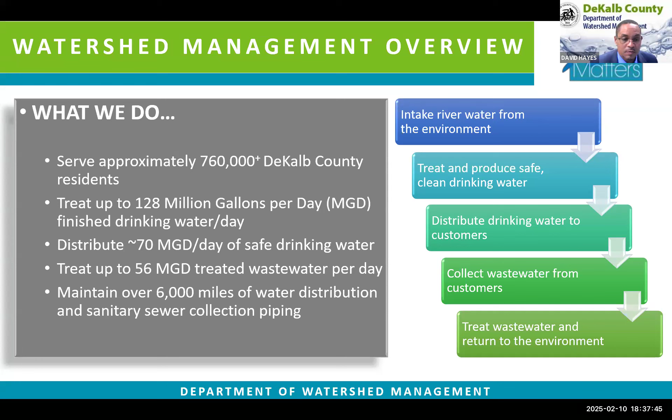So what are we talking about here? DeKalb has a gravity system, which we call a gravity main. The gravity main conveys sewer from your communities back to our wastewater plants. Your homes and businesses connect to those gravity mains using what we call a lateral, a small pipe leaving your house and tying into our sewer system in DeKalb County. What's happening is these laterals and sewer mains age, and as they age, they crack and develop imperfections. Over time, construction equipment or shovels may damage the pipe, allowing roots to get in and block or continue to break the pipe. There are also a great deal of illicit connections, meaning someone may connect their gutter system to their lateral, which then goes to our gravity main. This collection system is only designed to handle sewage, not stormwater. Stormwater takes up capacity and fills the pipe, and we don't want the pipes filled. So these projects are addressing those issues with our sewer main.

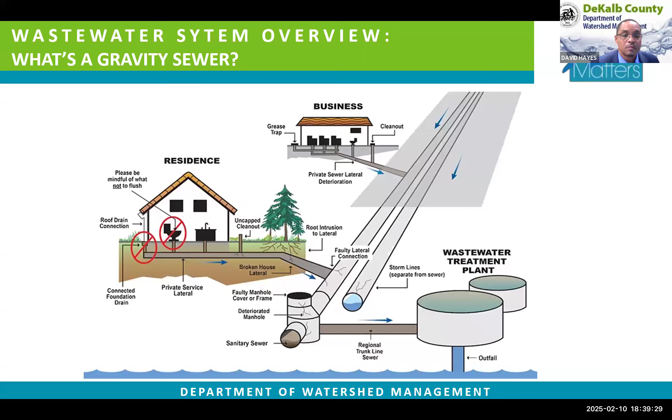So as I mentioned, what we're going to accomplish here is upsize or upgrade the system. We're upgrading the system to allow DeKalb to continue to grow and develop, and to be able to take care of more than 760, almost 800,000 ratepayers and customers throughout the county.

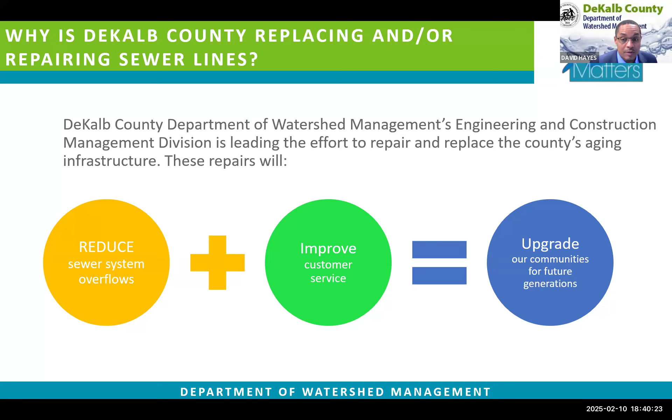We're doing that by improving the sewer system. In this case, we're going to upsize the sewer system in this area, which will allow us to improve customer service, get that wastewater back to where it needs to go—the wastewater treatment facilities—and keep it out of the communities to prevent SSOs or sewer overflows. That will make DeKalb a better place. Next slide, please.

So we've put together an A team to manage this project and see it through. The watershed engineering division helped design this project, along with the assistance of AECOM and Jacobs, two consultant engineering firms that work with us. And then we're going to have Kimmy Construction actually doing the work for us out there.

They're going to be managed, with oversight to make sure things are placed in the ground properly and at proper elevations. Gresham Smith and CERM and Arcadis partnered with us to make sure we have the pipe in the places where it needs to go, and that the slope of the pipes is what it needs to be to allow the sewage to gravity flow where it needs to get to—the wastewater plant, and away from your homes and residents.

So we are very pleased and confident in this team, and we know that this project should go on time, on schedule, and on budget, barring weather events and any other unforeseens that we may encounter as we're down in the ground. Next slide, please.

Next, you're going to hear from the managing engineering manager from the watershed, Ms. Alia Johnson. She is the manager assigned to help see this project develop, design, and engineer, and she's managing the firms who are helping us bring this project to you.

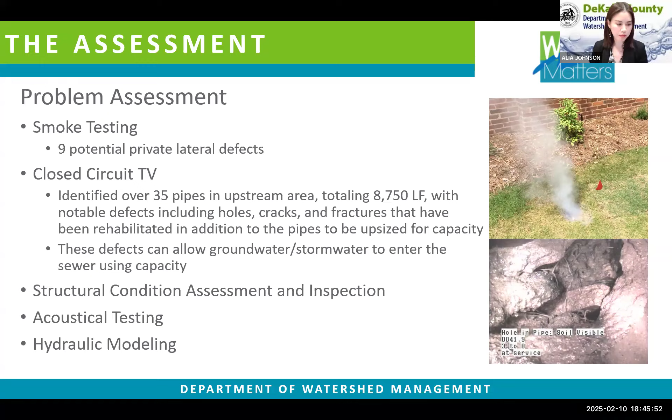So with us doing all the assessment, I just want to make sure that this area has fully been assessed, to help identify the most cost-effective way to fix this issue. So what is the problem for this area?

After we did all the series of assessments that I mentioned earlier, the first one is the infrastructure. The pipe that is in the system is over 70 years old, and with that age, some of the pipe had deteriorated over time, so it is outside of our standards. We want to make sure we fix and target the problem before anything bad can happen, so we just want to go ahead and improve that area.

Next, the lack of capacity. Like I mentioned earlier, when we measure the flow, we identified that the system as of right now can handle the current flow, but in a certain storm event, let's say a 2-year storm, whenever it's raining the pipe could fill up to the top of the manholes and overflow or come out from the manhole, causing the sewer to spill outside the system. So we want to increase the size at this time, also to handle any future growth in this area.

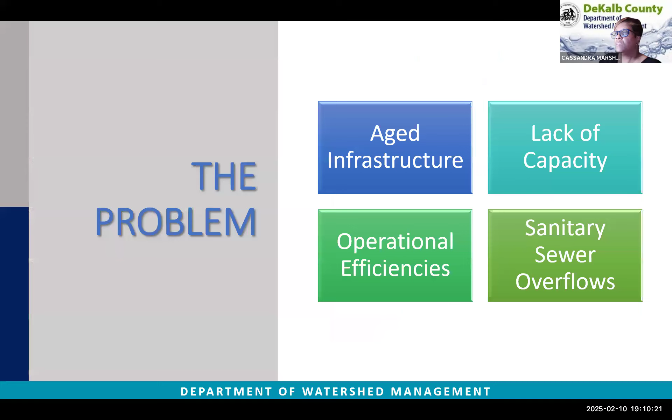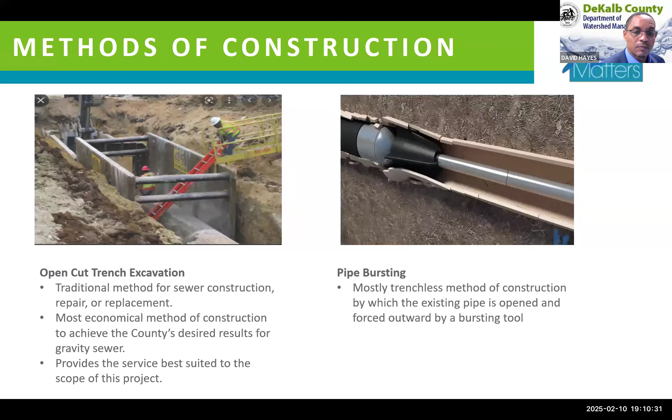Are the entrance and exit going to be the same location? Yes. Okay, so that again is between 2589 and 2599 Hawthorne.

Next question, please. It says, I might be the only one confused, but is this work taking place in the street or also in our yards, addressing the tie-in to the sewer in the street?

That's a good question, it's actually both. The first property is 2679 Caladium, which shows the starting point of the manhole in the road. I think we come out of it, put in a pit within the right of way in front of their yard, and start the pipe bursting work going through there. But for the most part, most of the work is behind the homes within the easements.

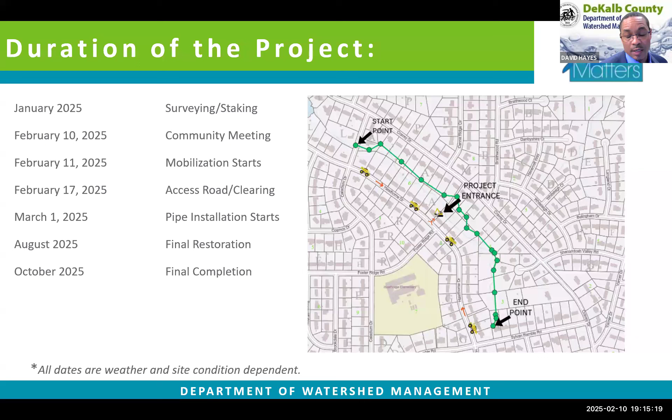Once we have established a completed segment, we will make efforts to restore that property once it's no longer needed to be accessed. So we're looking at maybe a day or two, or maybe a week per property or so, trying to get past that property with the pipe bursting. That is correct. Okay, I hope that answered your question.

Next question, please. Okay, for neighbors unable to attend tonight, how can they provide you their email addresses? They can do so by sending an email.

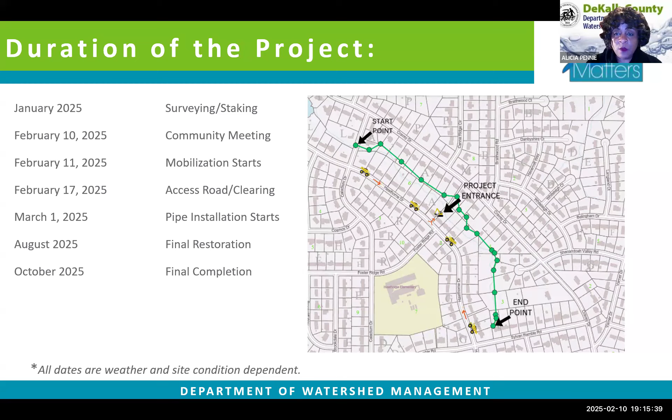All right, the next question, or statement: it was a specific condition of our stipulation that you would erect a temporary fence that would be secure for our dog. Please clarify this.

Ms. Marshall, would you like to comment on that, or would you like to? Well, I guess you can, but I think it's something we probably wrote in our easement negotiations. I guess we just need to figure out whatever accommodations they need to contain their animals. I agree with you, and I think that would be a property by property case situation.

Right, yes, we're in your community, and we're going to respect your community. So note that we are partnering with you to help make these improvements. We're going to do everything that we can within our limits to make sure that, again, as guests in your community, we respect your community and have boundaries of what we should and should not be doing. So we will definitely communicate case by case, but we're here to partner with you. We want to make sure that we get in your community, do what's needed, and return your community back to its original state or even better. But again, we're here to help, not to make problems or cause other issues.

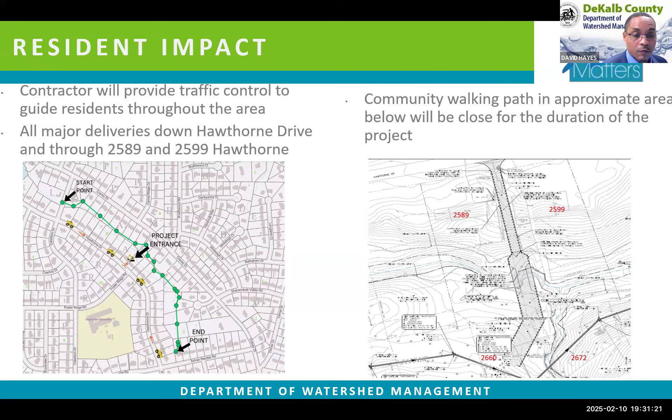We will have people out there all the time, and those people, Mr. Ari Kennedy and Mr. Williams, are county representatives. They will be there to answer questions you may have while on site. If there are any concerns that come up from construction workers in wrong areas, or something that's not quite right, please communicate with us, and we should be responsive and address whatever concerns may arise. Again, my name is Director David Hayes of Watershed Management. I really appreciate your time, and I hope this was informative to you, and we look forward to a great partnership and an improved DeKalb. Have a great evening.